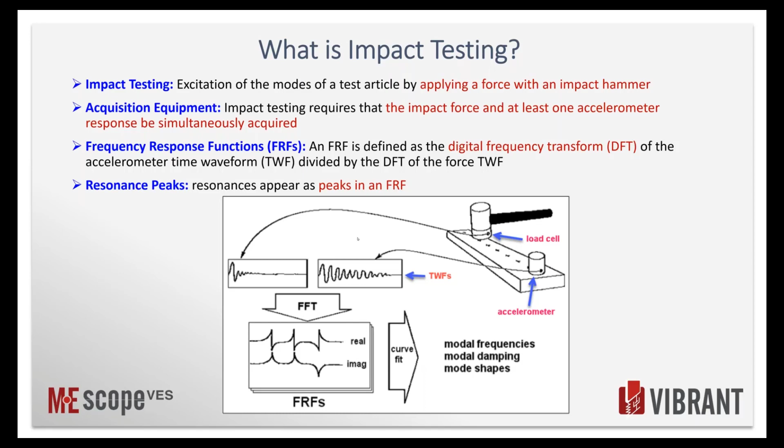It caused it to vibrate, and it looked exactly like the beam here. When I looked out at the highway in front of me, I could see it deflecting with a shape to it, a waveform. And the car actually jumped right off the ground.

The amplitude was so high from that resonance. Now that waveform was not trapped at what we call a continuous or infinite boundary condition. The energy was dispersed in the earth. And one thing about earthquakes is once the earth vibrates, about the time you get nervous about the vibration, it stops.

So anyway, that's a mass with elasticity, and just about anything else that we can think of that we make things out of, cars, airplanes, machine tools, we make them out of metal, aluminum, steel, cast iron, plastic, epoxies, carbon fiber, you name it. Any of those materials, if we make something out of them, whatever we make is going to vibrate if forces are applied to it. So let me click on this little animation here from MEscope.

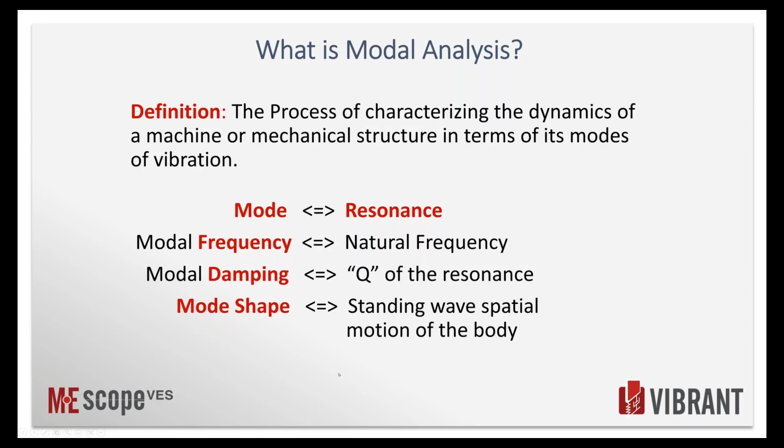Now there's a lot of limitations of the FEA model versus the experimental model and sources of error and so forth. We won't get into that today, but we just want to talk about resonant vibration because that's what modal analysis is all about. Defining the dynamics of a machine or mechanical structure in terms of its resonance.

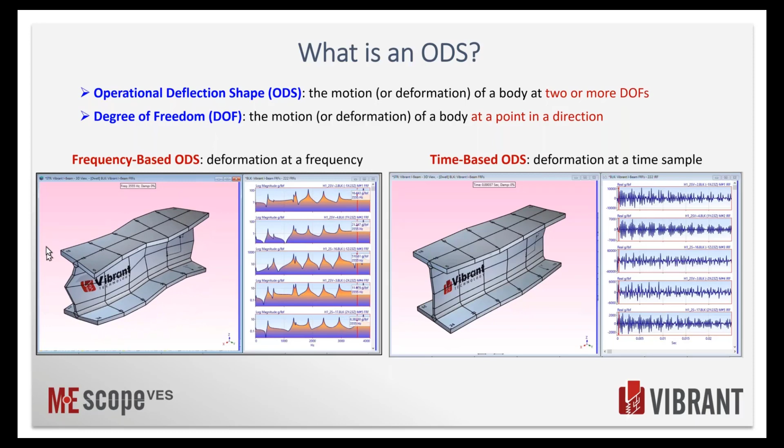And what we measure from the structure by putting sensors on the structure or with a camera measuring a video of the motion of the surface, that is ODS data. So this is a time sweep, a time-based ODS from a camera video. And of course, there's millions of pixels in the video, and then in MEscope, we reduce it down to thousands of points on a grid that's behind the video, and then we display the frames of the video on top of the grid of points, but we have the same time and frequency data that we would get from an impact test.

But this is what we call operating data. There may be impacting forces going on, but there's more like orders, forces that are, and we can see them in the spectrum. They're exciting the machine at specific frequencies that are multiples of the running speed. So there's the first order, and then here's the second order ODS, which is being dominated by a mode shape.

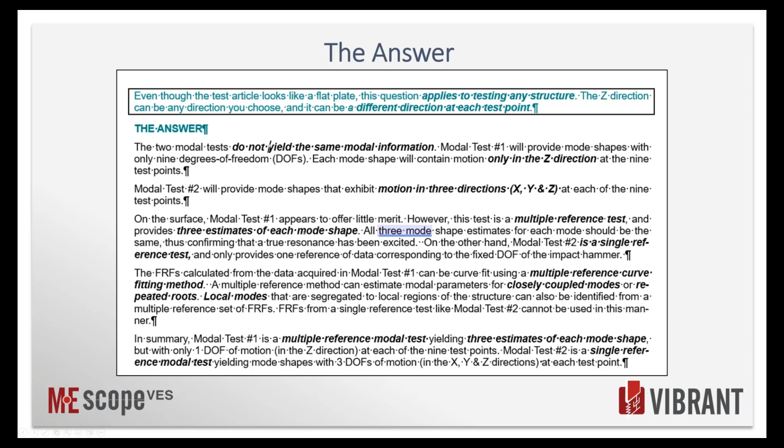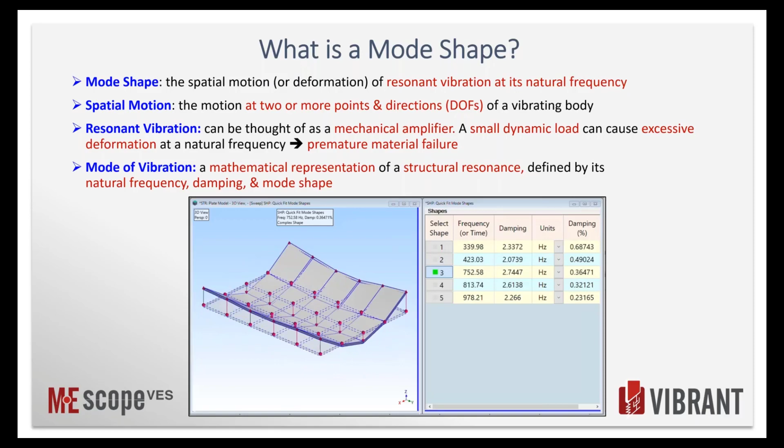But if you go to the app note and download the project associated with it, now not all app notes have one, but many of them do. The app note has hotkeys, and if you press a hotkey, that will execute a script, and it will take you through the steps of the app note. So you either get tired of reading the app note, which is a lot of details, or not sure how to run MEscope. But if you just want a refresher course, again, this is to people who already own MEscope, go and look at some of these app notes. I think we've got over 50 of them out there.